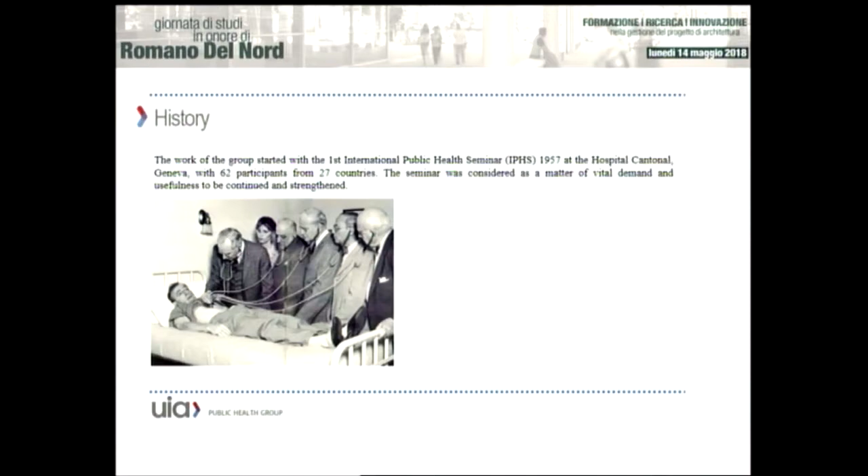The International Union of Architects is a group of architects gathering 6 million architects worldwide. Here we see the conference in Durban and our old president, Albert Dubler. The headquarters is in France, in Paris, and it was founded in 1955. Our group was founded in 1957 in Geneva. We had 62 participants, and it is a big organization concerning, and the only one I know, about healthcare architecture.

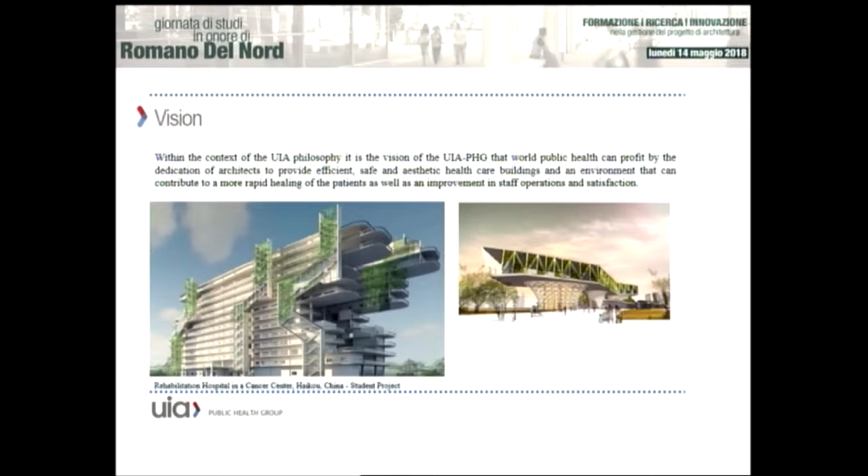Our vision is to bring healthcare architecture to the next level, to exchange internationally, and to profit from our experiences. We have a mission as well - you can see our organization as a body of knowledge. It's open source, meaning everybody can access the knowledge and everybody can participate as long as he's an architect and registered in an order of architects.

We are closely collaborating with the World Health Organization in Geneva and the IHF, International Hospital Federation, as well as with other organizations worldwide. Here you see we have a director - actually it's Cliff Harvey from Toronto, who follows Warren Kerr, and before it was George Mann.

We are closely working with University Networks, from Texas A&M to Dresden, Berlin in Germany, to Thessaloniki in Greece, covering till Malaysia and Singapore, all universities involved in healthcare architecture. Here are other associations like Architects for Health or the new coming International Health Association.

We are organized in seminars. Every year we organize a seminar. The last one was in London last year. During these seminars, we have visits, conferences, and we have an annual meeting and our annual gala dinner.

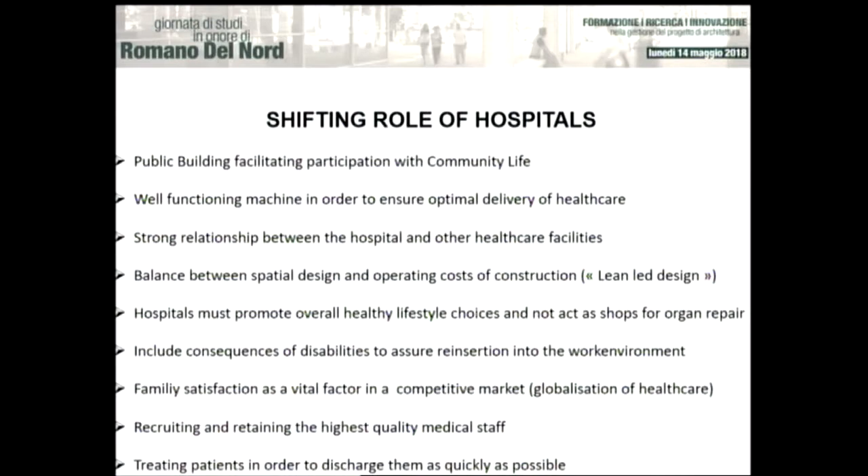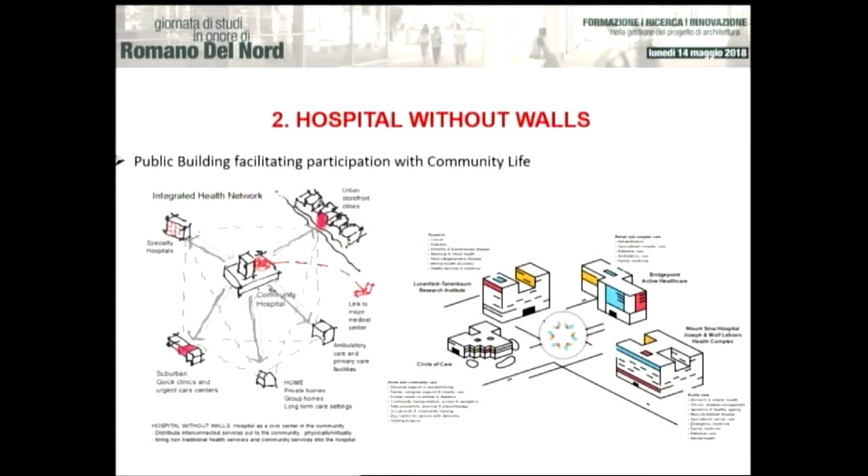I was asking Romano, but how can this work? And he said, you can try it.

We were approached by Hong Kong at this time, in 2015, and Joanna Hutung told us she had a problem addressing healthcare for children struck by diabetes. They cannot live in the hospital because they won't reach the population—children get no care because the parents are afraid to come to the hospital due to the cost, and the children also don't want to go to the hospital.

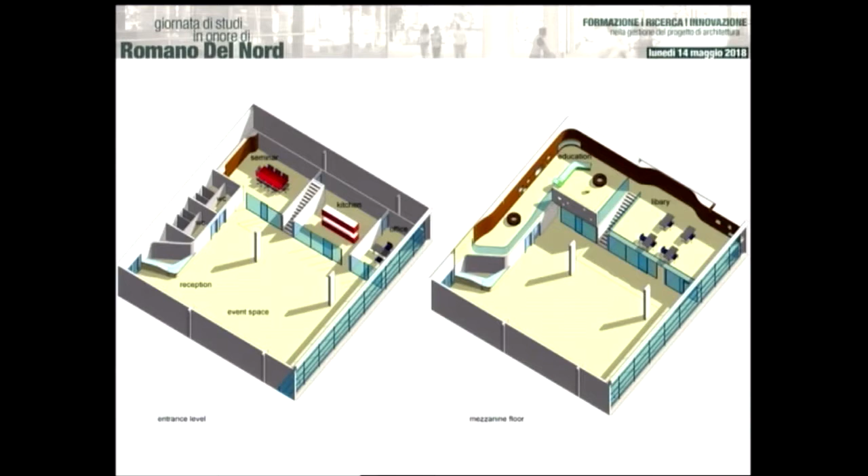So I was asking Romano, we can make a first approach. And he said, make a project—pick a site, make a virtual project, and present it to the client.

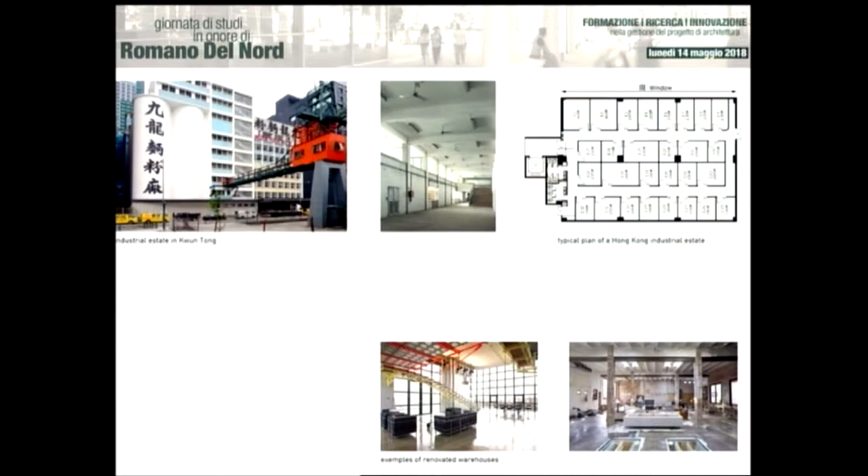So we said, okay, we can go into a loft, we can find a structure in a factory in the Kwun Tong area, outside Hong Kong but nearby. It's not so expensive. And we made some visualizations, and still you see everything is white, everything looks a little bit clinical.

And this was the first center of excellence that was presented to the client. The client said, okay, now we have to find the funding and the money for the project. So we organized a gala dinner. And one day they called us and said, okay, we have enough money.

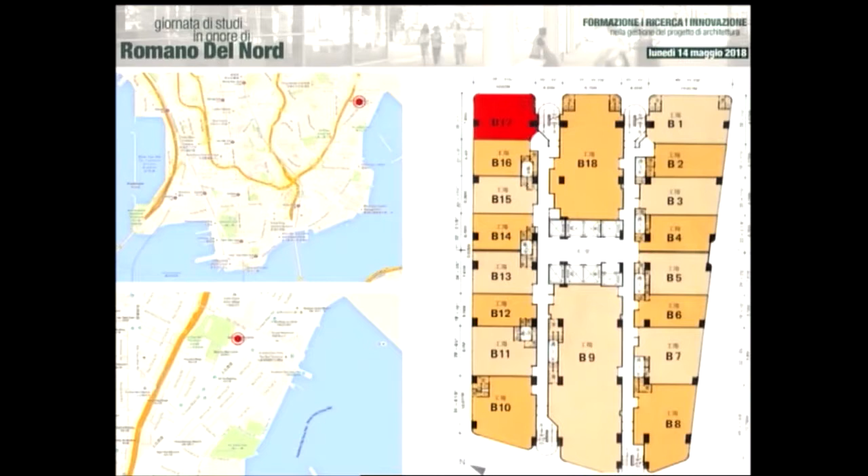We bought B17, it's in the Kwun Tong area. We found a 100 square meter factory. Now you have to make the project, but we have no budget. So we made a project, a very simple one. What we need is a kitchen, a teaching kitchen, a playground, offices, and a discrete room that can be opened or closed for discussions with patients.

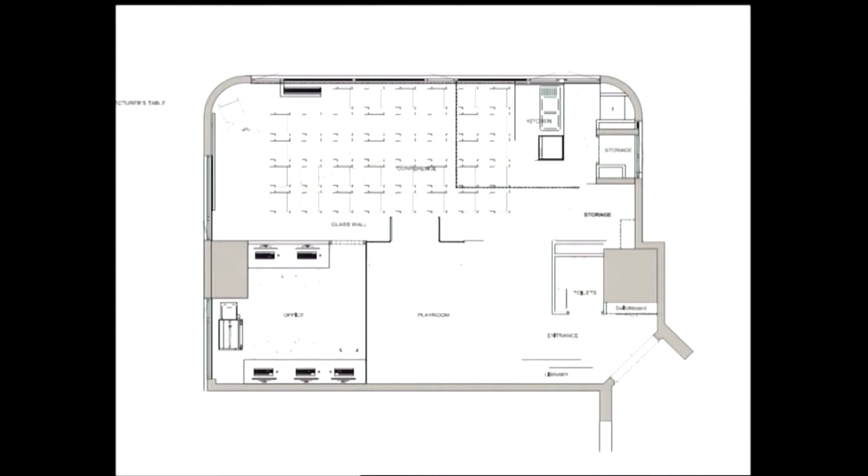And so we were going on, and within three months we were providing the center of excellence. That was, for ourselves, a big surprise because we only spent $90,000 on this project, and it has a big impact on the daily work for diabetes care.

Now we have the different costs. What are the costs? We have a global cost to consider when we talk about hospitals. It doesn't make sense to only talk about building cost. We have as well the in-use cost or operation cost, and we have life cycle cost and social cost.

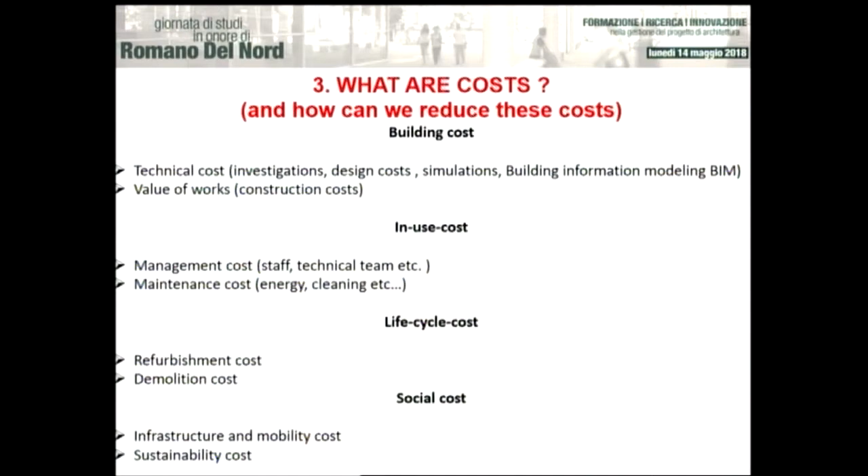So what we try to do in a project is to shift all decisions to an early pre-design stage. When we talk about cost as well, we have the initial cost of building, and we have the operating cost, life cycle cost, but as well social cost.

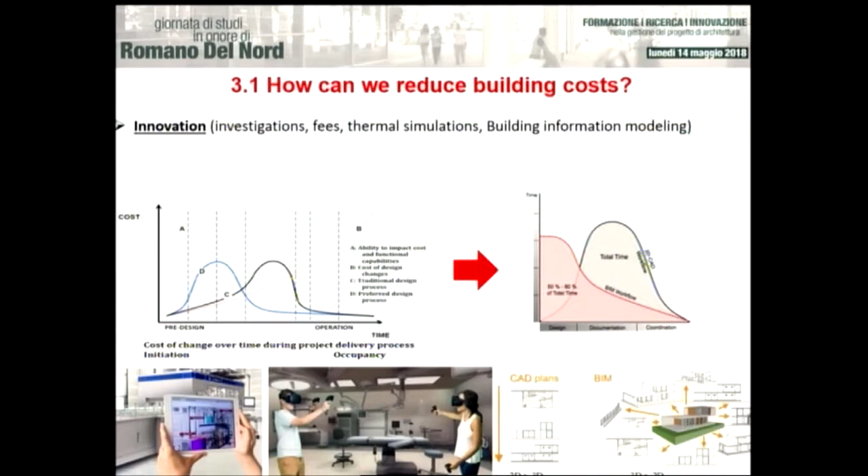So considering how we can shift to an early stage, we come to building information modeling, where we can shift decisions to an earlier stage because we have more information, and because our clients can better understand the product with a 3D model instead of 2D plans. We also have virtual reality where people can interact and see how the space will look. So it's much better to take decisions at an early stage.

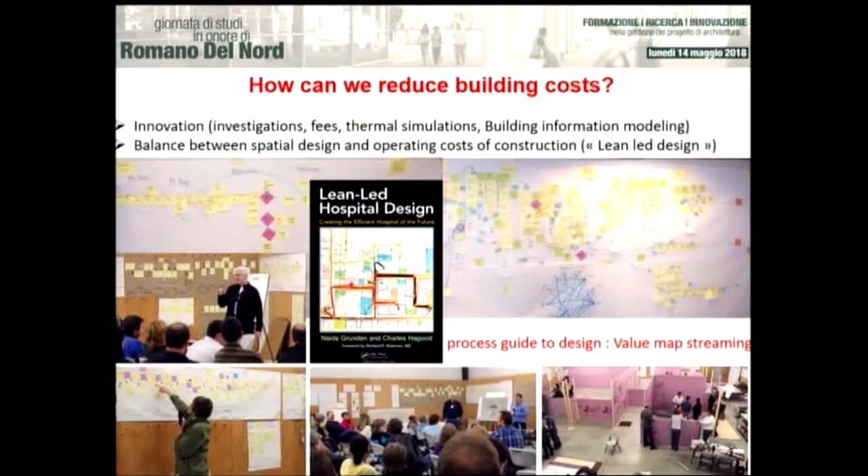On the other side, we have lean-led design. It's a new way of thinking, a process-driven design of our hospitals, with value stream mapping. It means we put the client in the middle of our interest, and we look at how the client goes through the hospital and where he loses time, so we can optimize the way the client or patient is treated.

This is a shift in the way we work with architects, and Romano was putting together with me these points, because we were quite aware this means we no longer have the traditional way where the architect focuses only on design, but we have to make observations at point of work. We have to pull the value to the patient - we have to look at the patient and how he runs through the hospital.

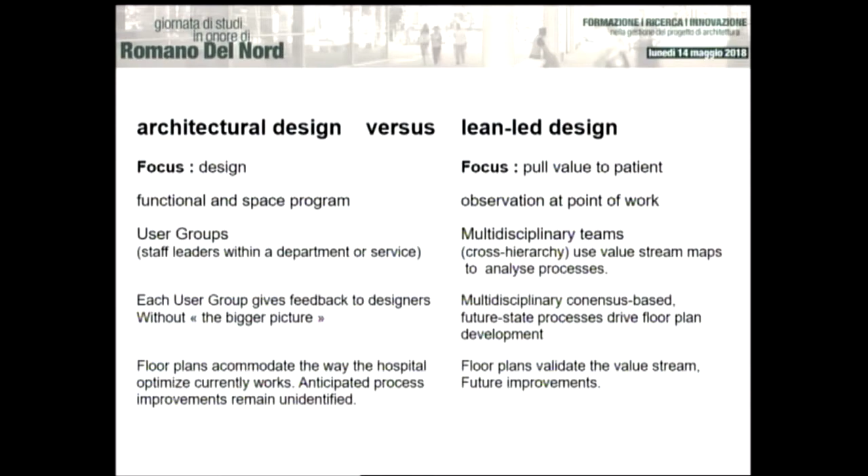So we move away from the traditional way, and we have a horizontal hierarchy in the working group. It means we involve all the people who are in the hospital to get better outcomes. This is organized with workshops and with mock-ups to visualize the way it can be done.

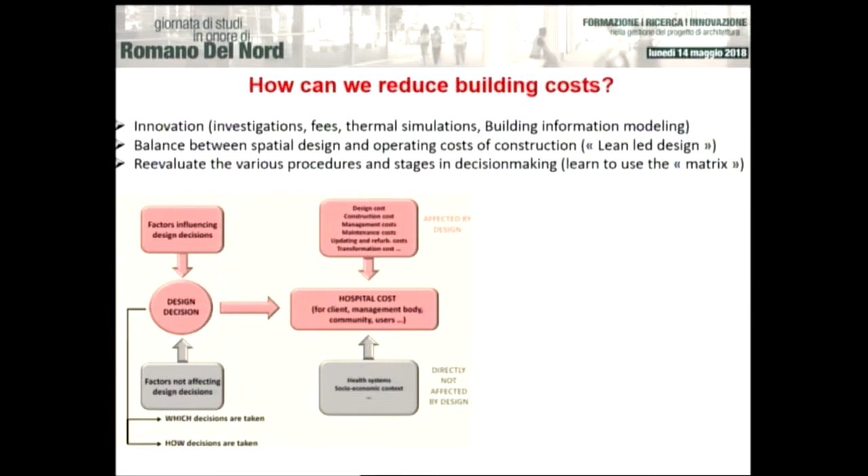The next point is we have to learn to use the matrix. There are factors we can influence in costs, but there are a lot of factors we cannot. So we started to interest ourselves in the red marked points - everything that is design cost and factors influencing design decisions. The biggest problem today is that many stakeholders are involved, and we have no clear vision of at what point who can lead and who can make decisions.

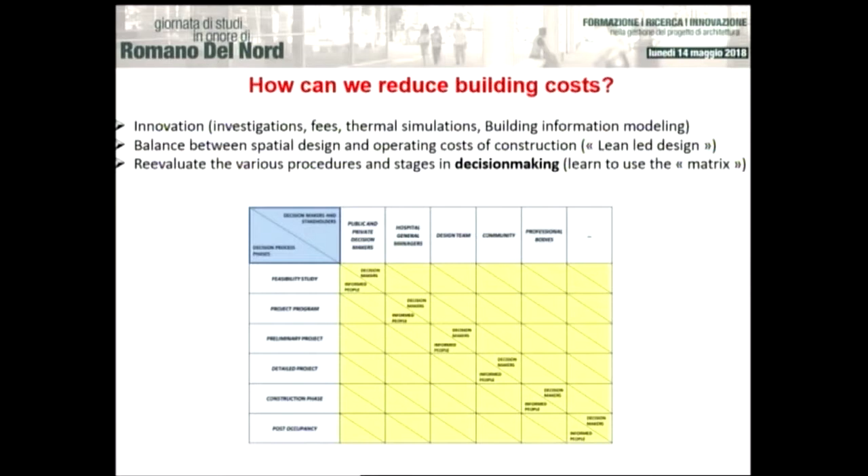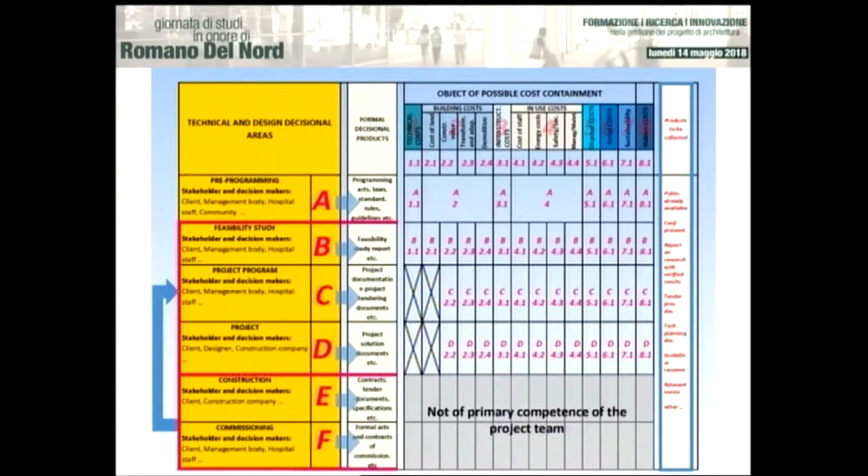We have here the different operation phases of the project and the definitions we have to make for the project to be successful. So we have overlaying three axes already of decision. The next point is to fill a matrix like this with knowledge. Whenever you have knowledge, you can put it into the matrix at the right point where the decision maker can look at it. At the end of this project, we will have a database where everybody can quickly find the information he needs for his point of interest and his decision.

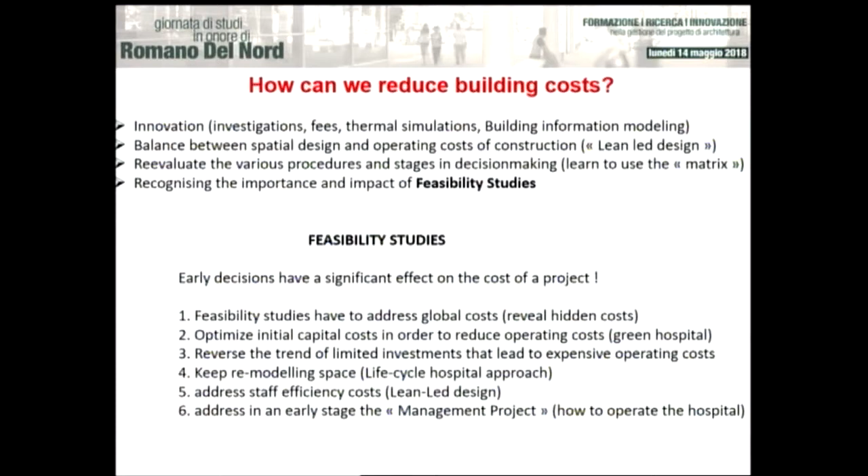Now, how can we reduce building costs? Feasibility studies. We have to give more importance to feasibility studies, but they should not be only architectural - we have to address the global costs. We have to address as well remodeling space, a life cycle hospital approach, and we have to integrate already a management project. So the feasibility studies become an important part.

For operating costs or in-use costs, many decisions impact the in-use costs, operation costs, like outsourcing. And many projects start without having a management project, how to run the hospital and how the logistics will work.

We see a typical cost of operation costs is 60% labor cost and 40% cost of supplies. If we look at the labor cost, we see that really 83% are spent on primary processes, meaning treatment, while only 7% for logistics. This is pretty good if you compare it to different industrial organizations.

And when we look at the materials, we see that 50% is used for the primary process, 50% for the secondary process.

Where we as architects can interfere is in energy, for instance. Energy is 6%. But 6% out of 40% means it's 2% of the overall budget of a hospital.

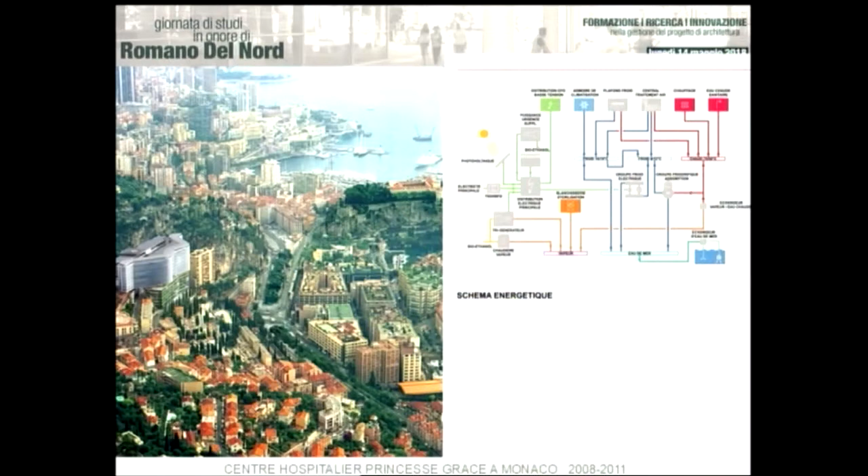So it doesn't seem big, but we looked deeper into it, and we took a reference project. This is a project we presented in 2008 to Monaco. It's the Princess Grace Hospital in Monaco. We were working on this project with engineers to bring down the energy cost.

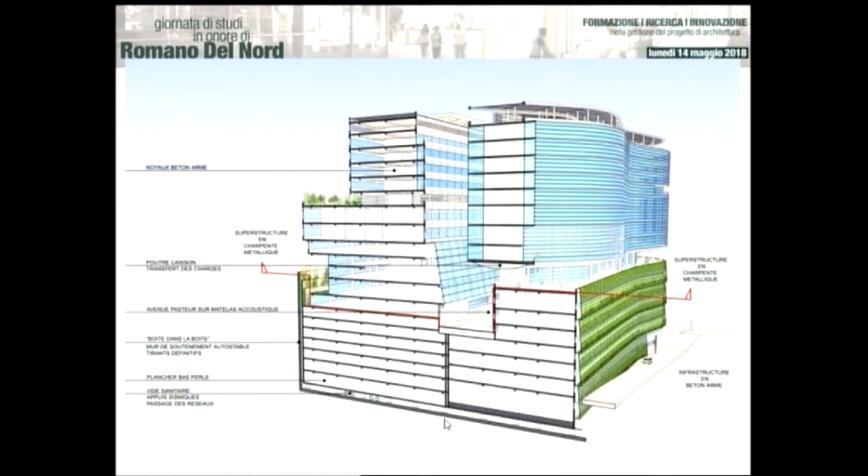And what we tried to achieve was to spend 4 times less energy than in the project before.

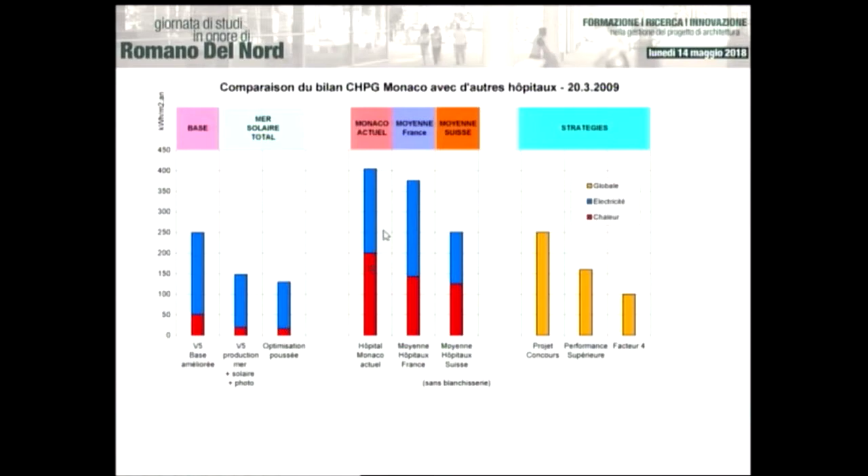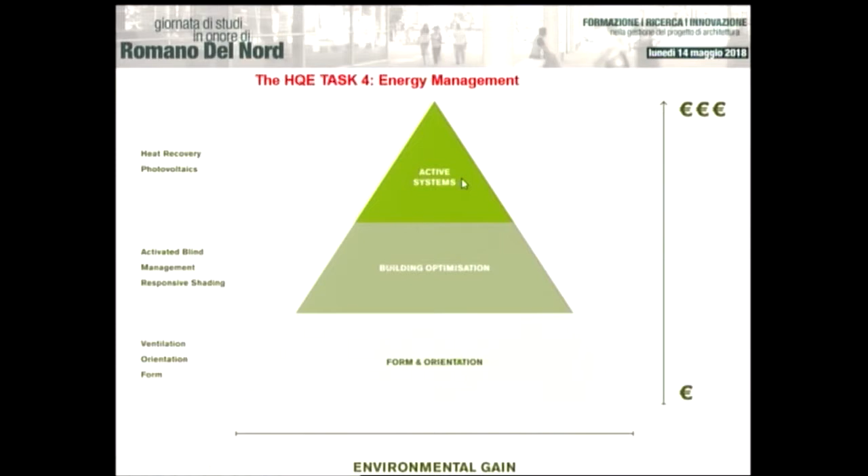So the more simple we are, orientation and things we learned 10,000 years ago, the most effective elements in environmental gain are the least expensive. And the more we come to sophisticated systems, the more money we spend to get finally very little environmental gain.

It came out that in our scheme we had energy, so we were going for sea cooling, we were looking for tri-generation, photovoltaic use of course, and using absorption chillers.

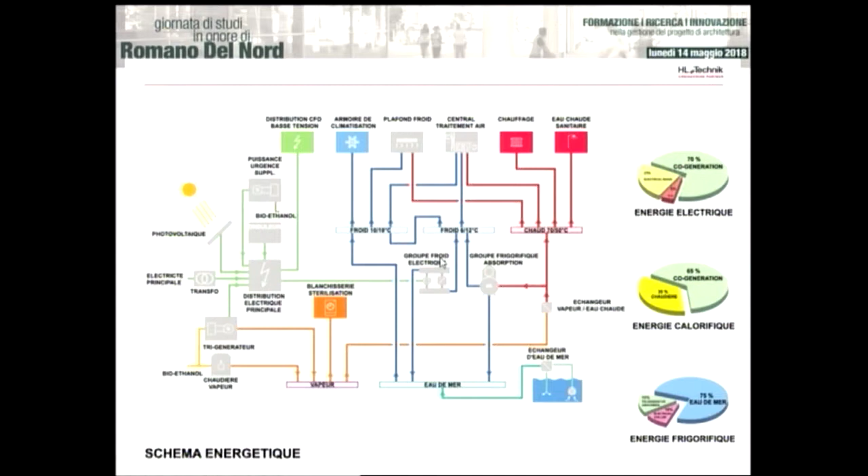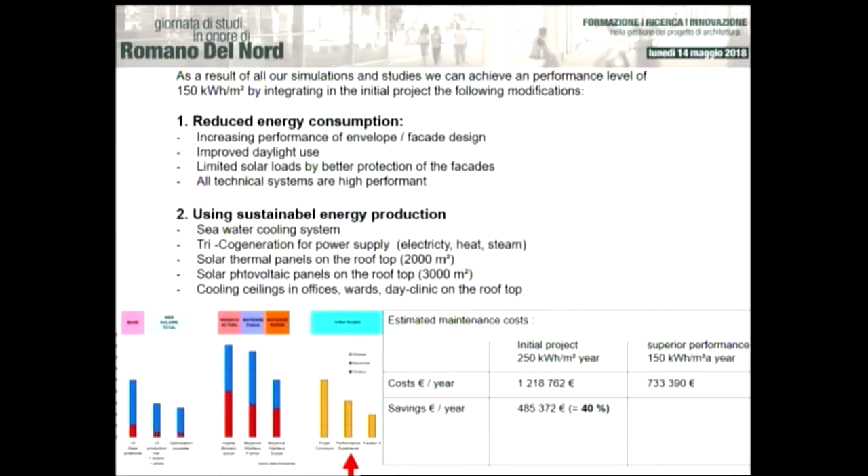It was a very sophisticated way to do it, but we had calculated the energy cost, and we found out with all our efforts we can save 40%. This means 500,000 euros. Compared to investment costs of 10 million, which represent around 3% of the budget, it still will mean we have a return on investment in 20 years, but on the other side, we have a future-proof building.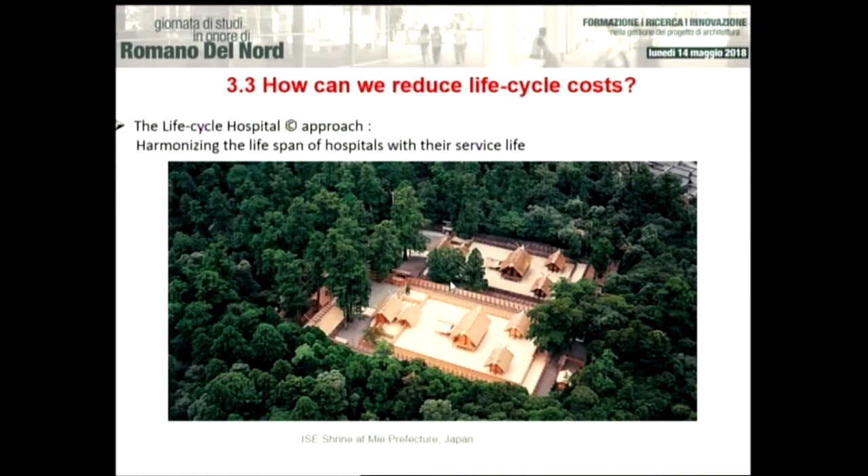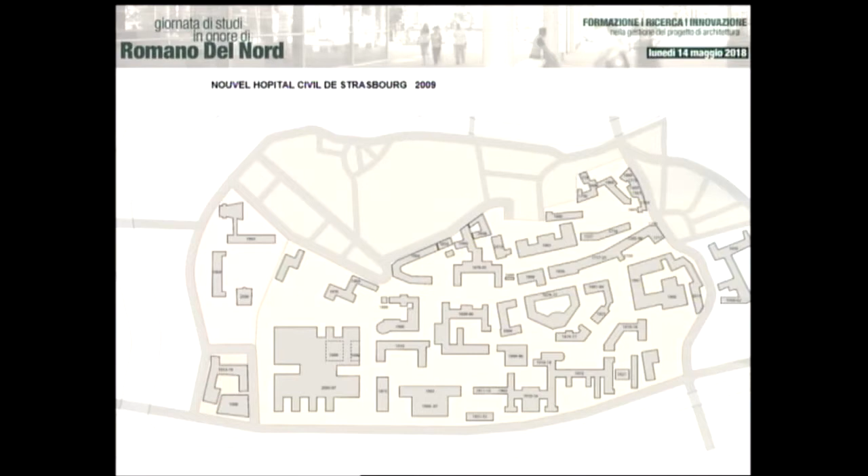We were working at this time on the hospital in Strasbourg that was involved in a very historic context of a medieval hospital site, very difficult to interfere with, but we wanted to keep the hospital on site. We were making a monoblock, integrating all flexibility, a modular building with a lot of spaces left for future extensions. A nice, wonderful day-lit gallery, industrial look, a real machine for healthcare.

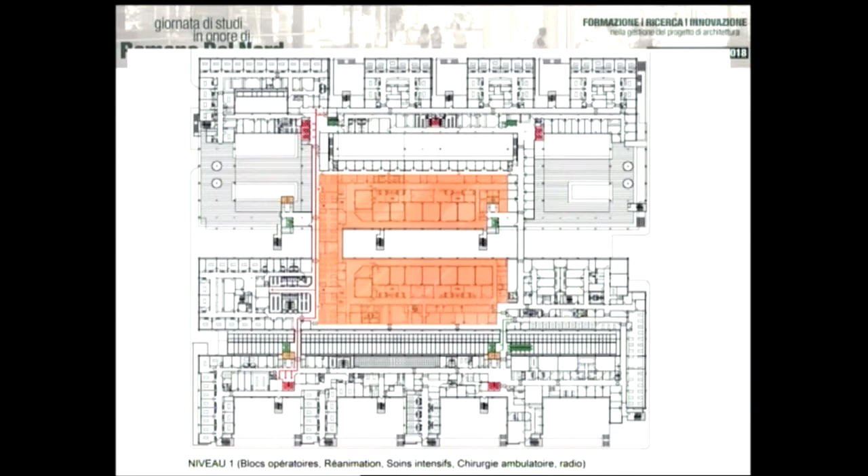And these are the operation theaters with the extension on the sides. But when it came to the point to make the first extension, the image-guided surgery institute of Professor Marescaux decided to go to the next side.

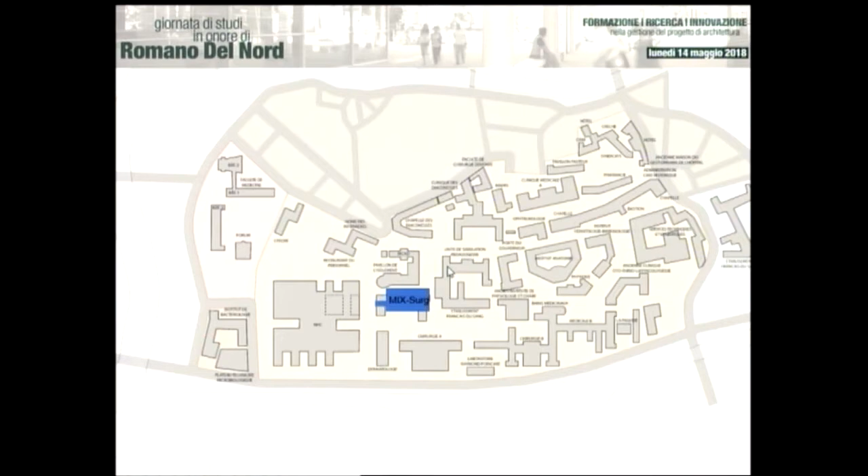Hospitals are very complex projects, complex like a hotel, integrating administration, a laundry, a pharmacy, workshops, so it has very different operational demands.

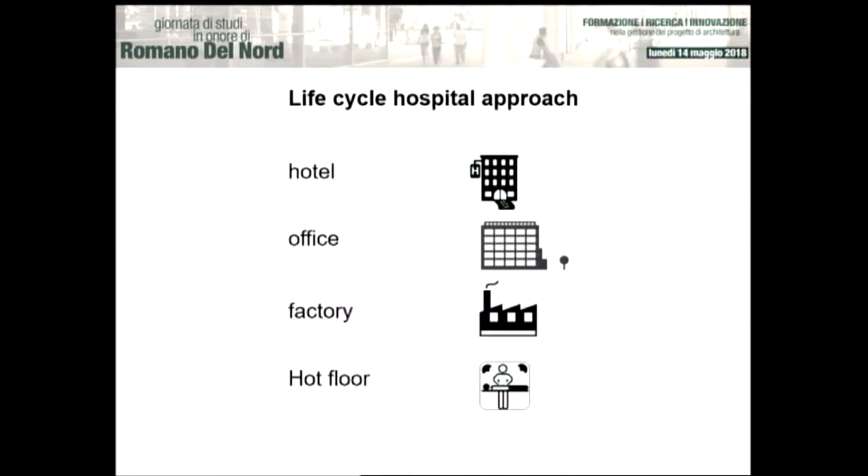Our friends from Netherlands already were breaking down the hotel, office, factory, hot floor into different elements of the hospital. But the main concern is that we have in current hospital buildings a lot of deficiency, like building outer shells that reached the end of life, new regulations to follow, lacking outpatient clinics and different floor levels and heights. And even the more flexibility you give to a building, you will never achieve a building that is fit for the future.

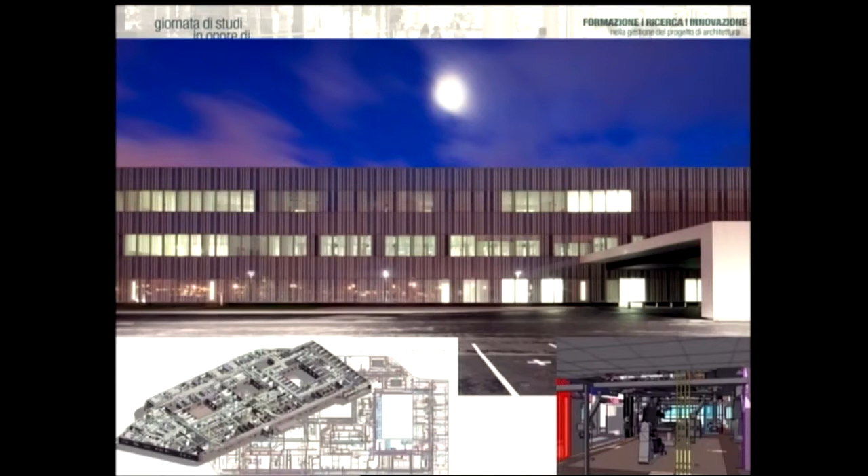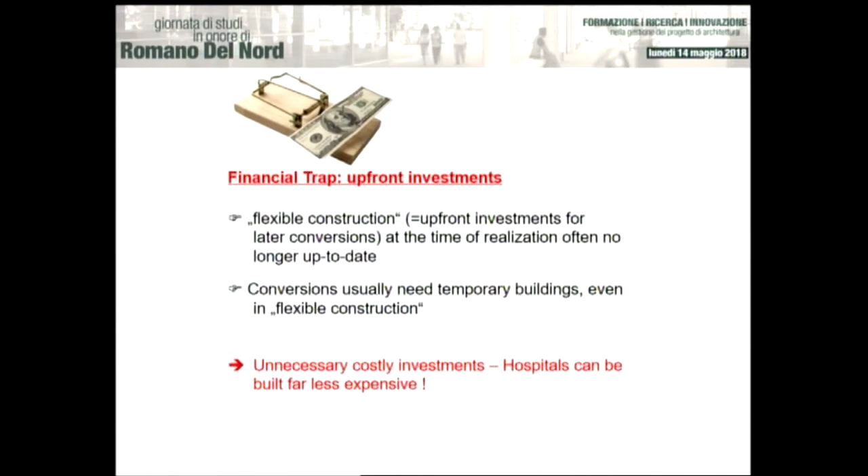So all these investments in flexibility, in modularity, seem to be very expensive and have in the end no real use, because the problem of hospitals today is the different lifespans.

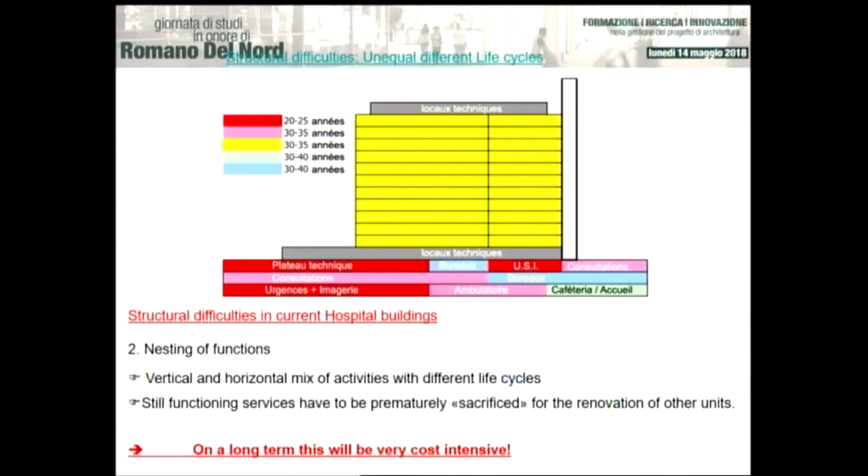It's because we're putting together and nesting the lifespans of different features, like offices mixed with hot floor. This is very expensive because whenever a facility with a short lifetime is fixed, it will affect parts with a longer lifetime.

We have here a typical hospital in Switzerland, like all hospitals. When we look over the years, we see a lot of interventions and additions happening to the hospital. The lifetime hospital approach will allow us in the future to create a hospital that avoids this kind of mess and congestion, that always ends at a point of no return where we have no possibility to make it work anymore.

So the consequences for renovation are that we create a lot of emissions, noise and dust, and we use and spend a lot of money for temporary structures. This represents a great strain on the constitution of patients and staff, and a loss of activity as a risk.

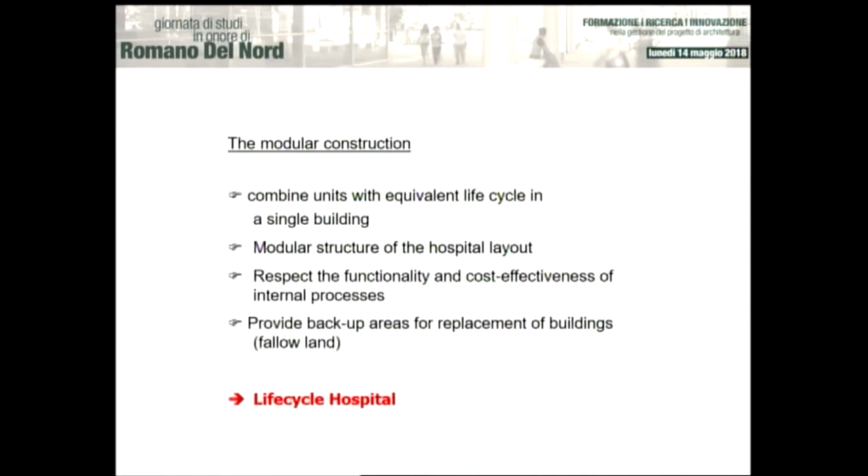So we have to find new ways of hospital structures, and we have to find a way where we provide backup areas for replacement of buildings, modular, and we call it the life cycle hospital approach. Here we see the hospital as it is today and the future plan, how this can be solved.

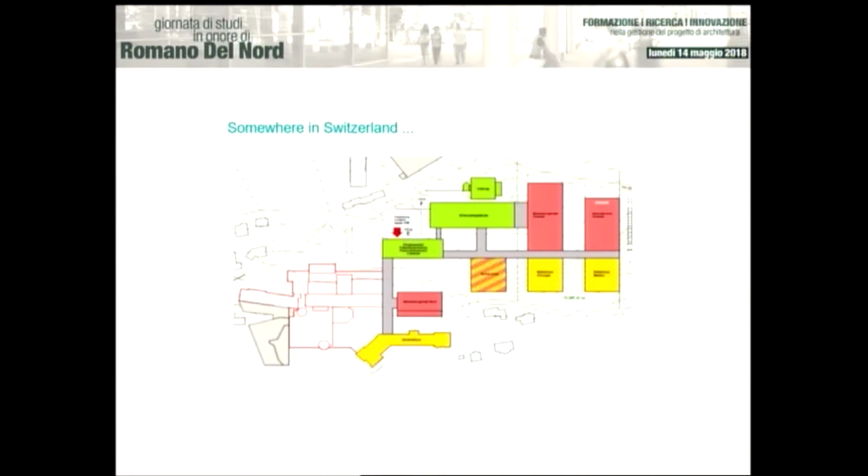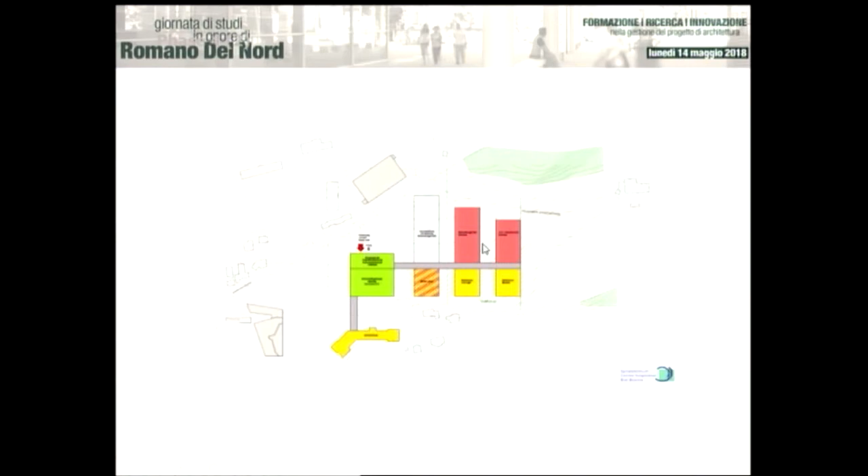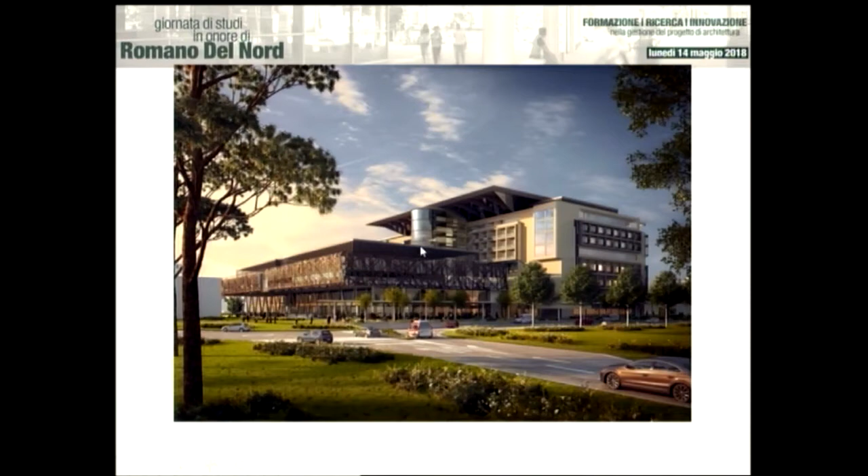In 2017, we made a competition in Luxembourg for a life cycle hospital, where we clearly separate the block with the wards from the block with the hot floor, which has a lower lifespan of facilities. So it works as well for new hospitals as it works for old hospitals.

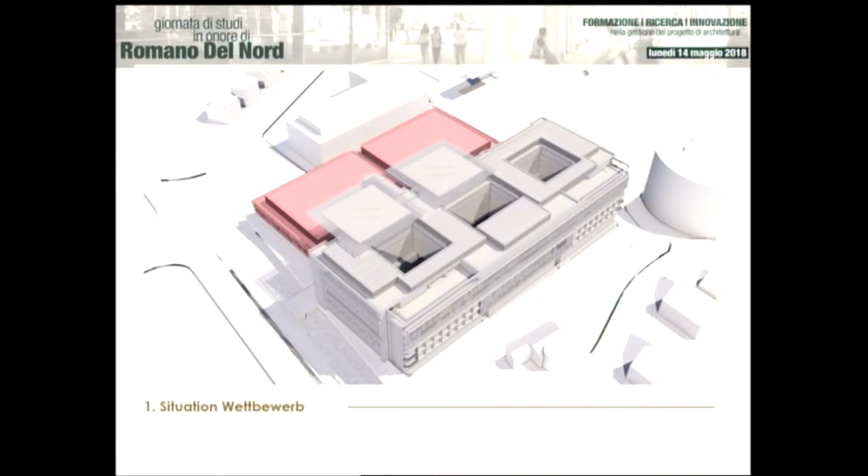Here we see in the graphic that in the future we have extension fields that allow us to extend the hospital, to build new facilities while reusing or demolishing old facilities.

Now we come to the last point, the social cost. We have a lot of constraints, and this is one of the wonderful graphics by Romano, where we see it's like a mandala, an Indian mandala. The more you look at it, the more you understand the complexity behind and the beauty of his thinking.

We have the cost in the middle. Around it we have the timeline with the different stages of construction, and on the outside the constraints from society and geographic context, impacting the cost and the design. And when we have built the hospital, the whole mandala turns again.

For instance, we have a change in legislation. It changes the project, and so we are turning and turning, and the project will always continuously change.

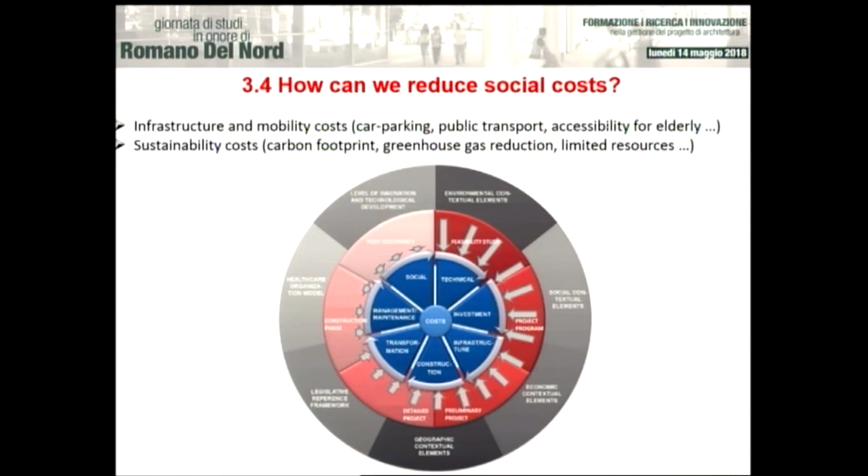We have our workshop in 2018 on the 28th of May, and we will see you in Paris, and we will hopefully be able to continue the work of Romano. Thank you very much.